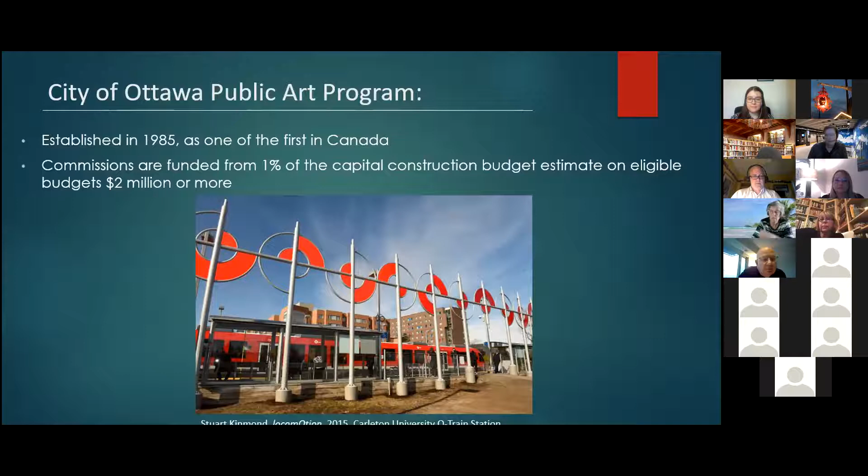So just a little bit about the public art program: we were established in 1985 as one of the first in Canada. It's a city-run program. We obtain 1% funding from all city construction projects that are over $2 million, and we put that funding towards public art projects that you see in and around city facilities and outside. I'm sure you've all experienced at least a few of them.

The O-Train Public Art Program is run out of the Public Art Program. I'm the project manager for the O-Train Public Art Program. We started running the program with the Stage 1 O-Train, initiated in 2012 with 13 stations.

We retained 24 artists for Stage 1 with multiple art projects in each station, with specific focus at Pimisi Station for Algonquin Anishinabe artists. We retained 6 Algonquin Anishinabe artists, along with a mentoring program for Algonquin artisans and heavy community engagement for that station, related to the public art projects there.

All of the stations had a variation of integrated or non-integrated artworks - artworks that were an integral part of the design of the stations, and others that were more standalone. We also program a new gallery space for professional artists in the Rideau station West Concourse, called Corridor 4575. You may have seen that going through downtown.

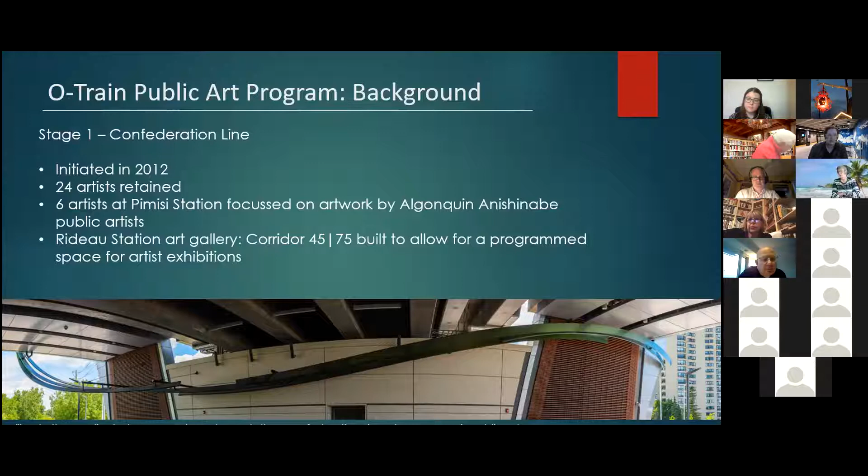Stage 2 is continuing the O-Train Public Art Program with the Confederation Line Extension and Trillium Line extensions. We are including artwork at every single station along the Confederation Line. We have 3 artist teams currently working away, and they've progressed their designs working integral with the station design teams. Each of those teams has about 5 to 6 stations that they're addressing and integrating public artwork into.

For the Trillium Line extension, we have 1 artist team working on a digital public art project within 3 stations: Limebank, Corso Italia (which is Gladstone), and South Keys. They're at the same level of progress. All those teams are at the same level of progress in their designs.

So it's pretty exciting. Specifically though, to this community, to this meeting tonight, I want to talk a little bit more about a really exciting project that we're just initiating in the Byron Linear Park and Richmond Road areas.

Back in 2012, we had identified this area as a really great opportunity for public art because we were aware of all of the construction and work that was going to be taking place in the area. Due to that impact, we thought this would be a really great opportunity to initiate a project that we call civic art, civic practice, or social practice, that heavily focuses on working with and engaging the community.

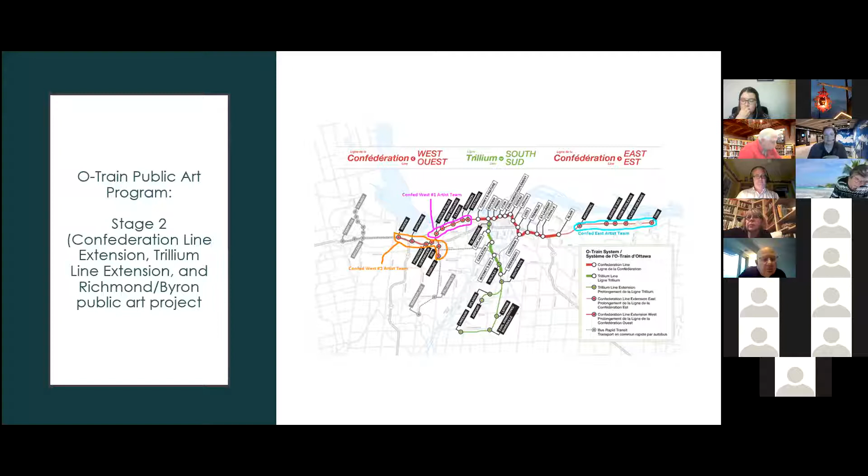Really, the focus of the public art process is the process itself rather than the end result. There will be an end result of some kind, but the process is the thing that's going to really guide us towards what that end result is. And the process is going to heavily involve the community.

Because this was sort of a new type of project for us - we hadn't really done a project to this scale and this heavily involving the community in the past - we thought it might be great for us to strike an advisory group that can basically help guide us and advise us through this process.

So we retained a group of international social practice public art experts who continue to advise us today. There are members of the community on that advisory group, and they'll continue to advise us going forward.

We also engaged a group of grassroots consultants to conduct an initial arts-based community engagement report in the Bay and Kitchissippi wards, and they did that work back in 2019, I want to say. That report was the basis for the call to artists to retain an artist team.

They took a lot of that information - demographics, a snapshot of the cultural community and arts community in the area, including nonprofit and for-profit organizations. It was a really thorough and intense report that really helped lay the groundwork for the artist teams coming in.

So after developing a social practice public art project, the pandemic hit. International politics and mindsets of cultural communities began to shift, which warranted a rethink of our project approach. So we pivoted the project to focus on community recovery and response using an arts-based approach.

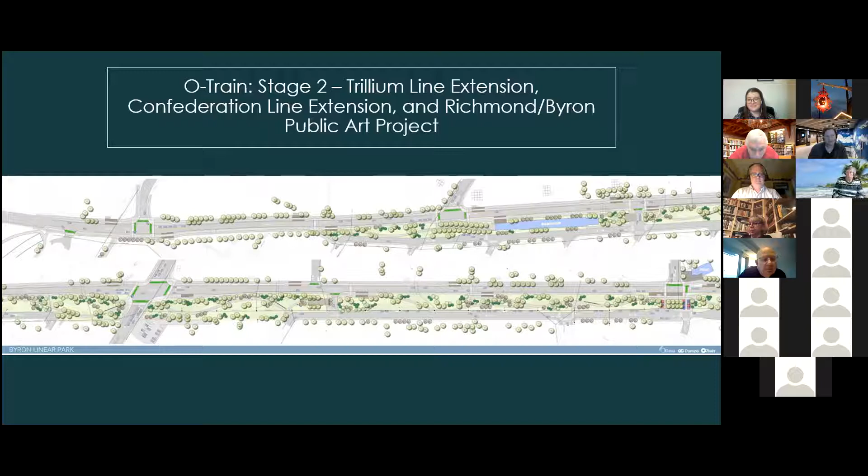Based on that scope, we conducted a 2-stage international competition to find a qualified artist team, and now we have one on board. We have yet to release the public winners announcement or the name of the winning team, so I can't tell you their identity yet, but it's coming very, very soon - in the next couple of weeks, so that is imminent.

The selected artist team, I can tell you, is a group of very enthusiastic and exciting individuals who bring a wealth of knowledge and expertise in their fields, and will be working with the community towards providing the identified project outcomes.

So the outcomes we identified at the beginning of this project were to increase the number of new artists applying to the public art program opportunities, expand the definition of public art, and create a space for new forms of public art. By new forms, I mean not necessarily a tangible asset or a standalone sculpture, but something more ephemeral or involving system changes.

Increase the scale and scope of civic arts practice as a public art form, retain national and international artist teams and agencies for the O-Train Public Art Program to match the level of expertise happening within the Confederation Line and Trillium Line Extension public art projects, and increase awareness and support of public art in the Byron-Richmond community.

So this is a really important and ambitious project for the City of Ottawa. Transit systems are now at the cusp of creating new social space for all people. This project is a continuation of the Stage 1 public art projects, and it's a unique partnership between all 3 levels of government.

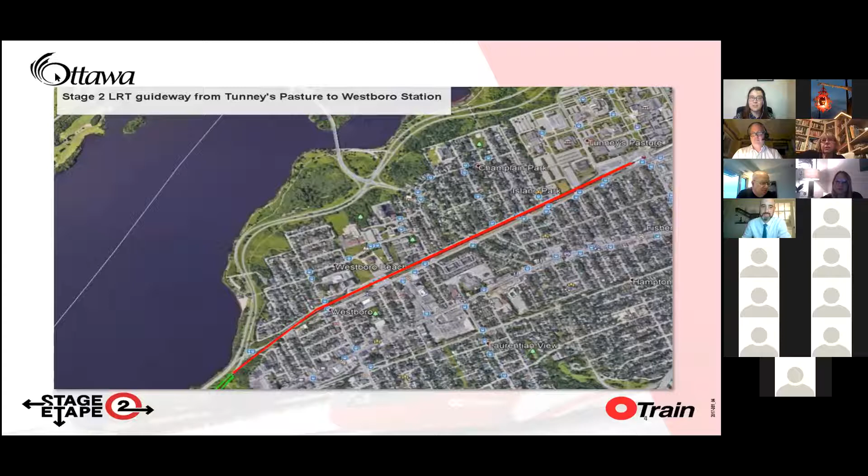So we'll get right into it. Between Tunney's Pasture and Dominion stations, work has begun to prepare for the Transitway detour, which will run along Scott Street and begin in April of next year. The Transitway detour will result in buses operating in general traffic along Scott Street between Tunney's Pasture Station and Churchill Avenue. Scott Street is being widened to accommodate an exclusive eastbound transit lane between Lanark Avenue and Island Park Drive. Additionally, the MUP on the north side of Scott Street will be increased in width to 4 meters. During the Transitway detour, the Westboro station platforms will be relocated to Scott Street.

Detours along Scott Street to facilitate this work in preparation for the Scott Street detour will be in place starting in the fall. West of Churchill Avenue, Scott Street will be extended as a temporary transitway roadway to Dominion Station. This temporary transit-only roadway will be on the south side of the existing transitway until a point just east of Roosevelt Avenue, at which point it will cross to the north side of the existing transitway south of Workman Avenue until it meets the Sir John A. Macdonald Parkway in the vicinity of the existing Dominion Station.

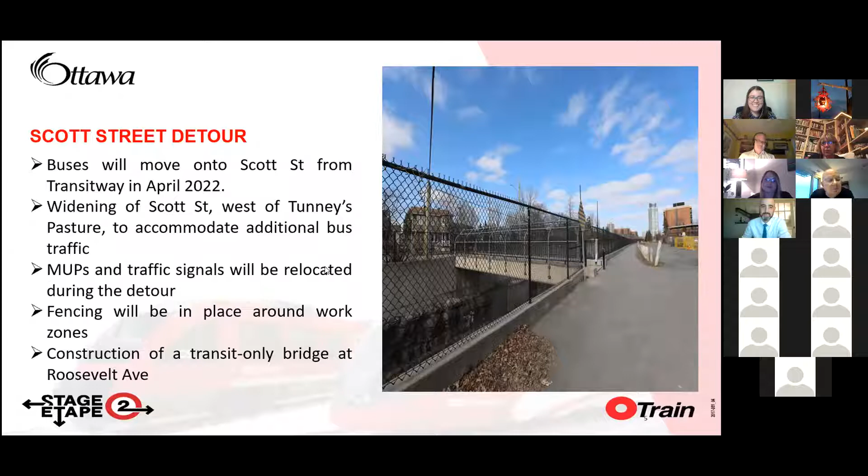During the Scott Street detour that will start next year, the new temporary transit-only roadway will cross the Transitway Trench on a new temporary transit-only bridge, which will be installed this summer. In order to build this bridge, the existing Roosevelt pedestrian bridge must be removed. This removal will occur in May, though the date has yet to be finalized. Utility relocation and other preparatory works for the pedestrian bridge removal and the bus bridge installation are already underway.

Following the removal of the pedestrian bridge, pedestrians will be detoured to the east or to the west to cross the transitway at either Churchill Avenue or at the Parkway intersection. This detour will be in place for the duration of this work and the Scott Street Transitway detour. The pedestrian detour signage will be posted 2 weeks in advance of the detour starting.

Post-construction, following the removal of the Scott Street Transitway detour, the Roosevelt pedestrian bridge will be reinstated in its original alignment.

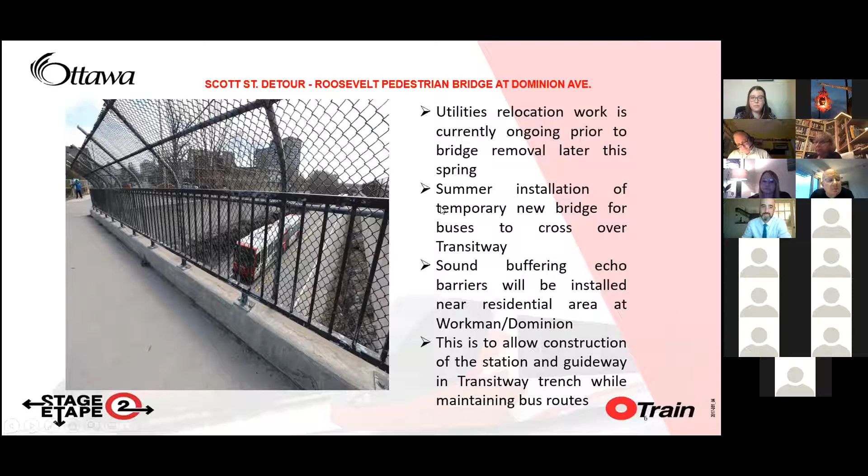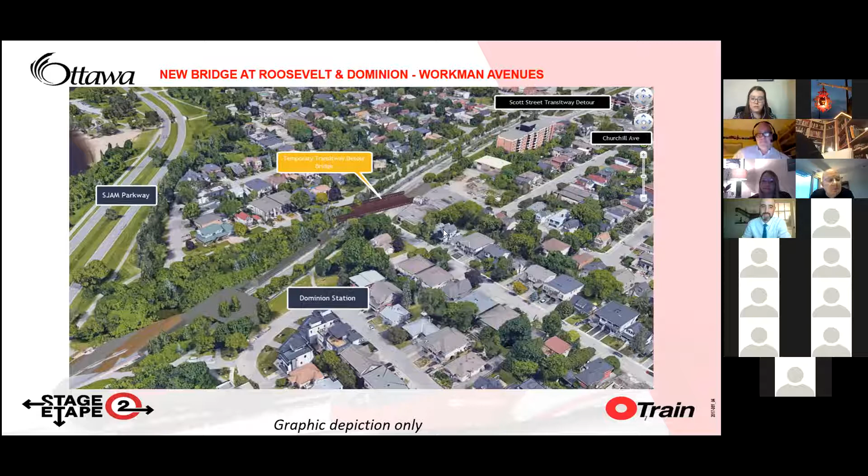Here we have an east-facing aerial image of the currently named Dominion Station area. The station will adopt Kìchì Sìbì as its new station name as part of Stage 2.

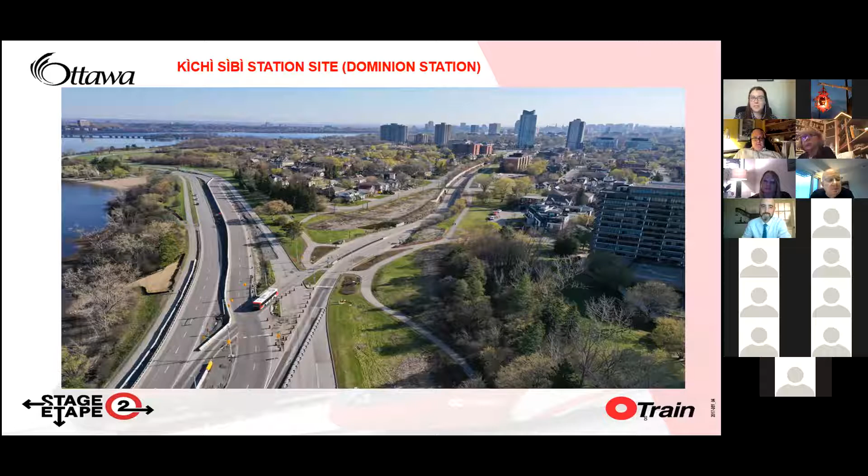North of the Kìchì Sìbì Station area, utilities relocation work between Atlantis Avenue, the Parkway, and Kitchissippi Lookout is advancing. This work will require closure of Atlantis Avenue between Lanark and Selby. Local access for residents will be maintained, and a notice of road closure will be delivered to affected residents ahead of the closure starting, which is currently anticipated for mid-May.

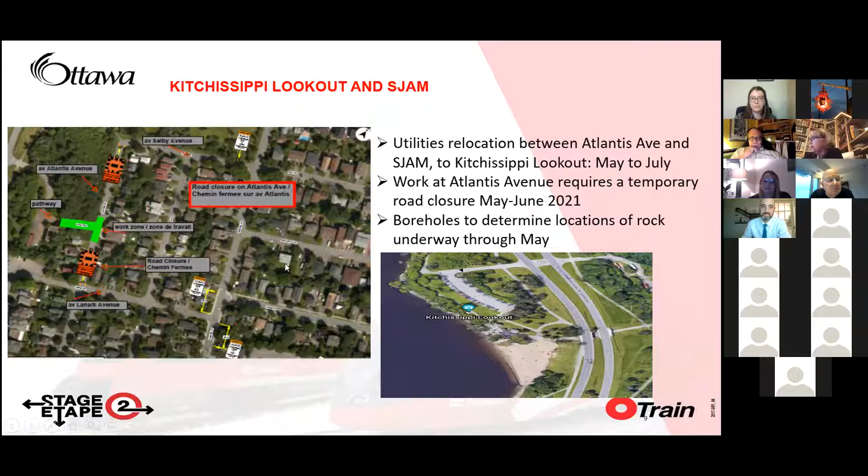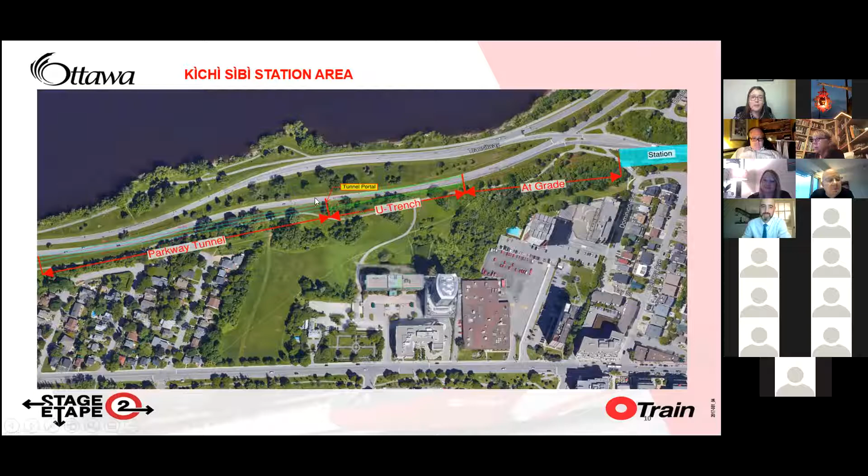I believe there was a question about how this transition was happening, so I hope this illustration provides an answer to that question.

Installation of the slurry walls to support the eventual tunnel excavation along the area behind 655 Richmond between Rochester Field and Cleary Avenue is progressing.

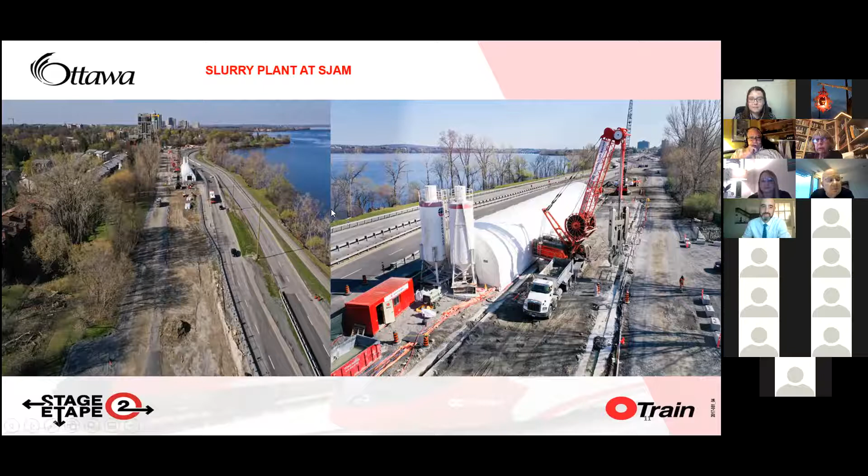Over the next two slides, so this one and the next one, we have some images depicting the operations at this site. We'll give everyone a few moments to look at those.

I have corresponded with a few residents regarding issues about loud music, profanity, and dust here at the slurry plant location. The team endeavors to be a good neighbor and responsive to complaints when they are received, especially where it concerns loud noises. Corrective messaging is always issued to the on-site crews.

To control dust, the access road within this site is currently sprayed and swept at least twice a day. A dust suppressant will be laid down on the road within the next 2 weeks. This will reduce the need for the daily spraying and sweeping, but spraying and sweeping will continue on an as-needed basis after the dust suppressant is laid down. These mitigation efforts help to reduce dust, but cannot completely eliminate it.

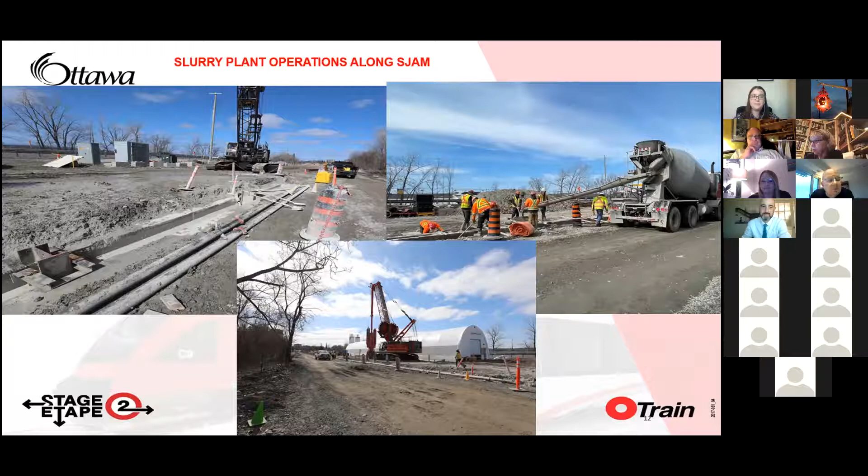In the Cleary Avenue and Richmond Road area, excavation related to utility relocation work in order to make room for the construction of the tunnel is continuing. Installation of a new 13-meter deep sanitary manhole for the West Nepean collector sewer is ongoing. Installation of a new water main will occur this summer with completion expected in August. During that work, road detours will have to be implemented. Utility relocation work in this area is expected to be completed by the end of the year.

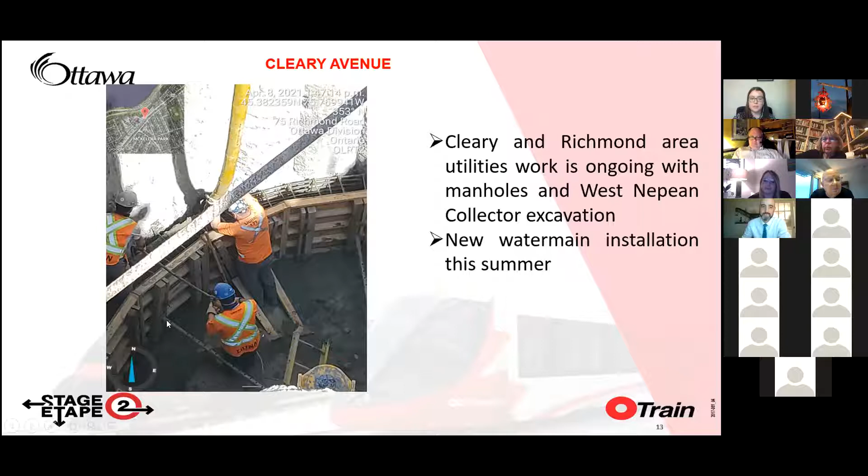Excavation work for the portion of the tunnel where it will cross Cleary Avenue, connecting the Byron Linear Park segment of the tunnel to the SJAM Parkway segment of the tunnel, will start once the utility relocation work is complete. Here on this slide, the red shading represents where the alignment and excavation does cross Cleary Avenue. This work will start next year once all the utility relocations in the area are complete. Detours will be required to complete this work as well.

This is a very rough sketch, but the pink line, which I hope is visible to everyone, does represent where sidewalks will be maintained to preserve pedestrian access while that work is going on.

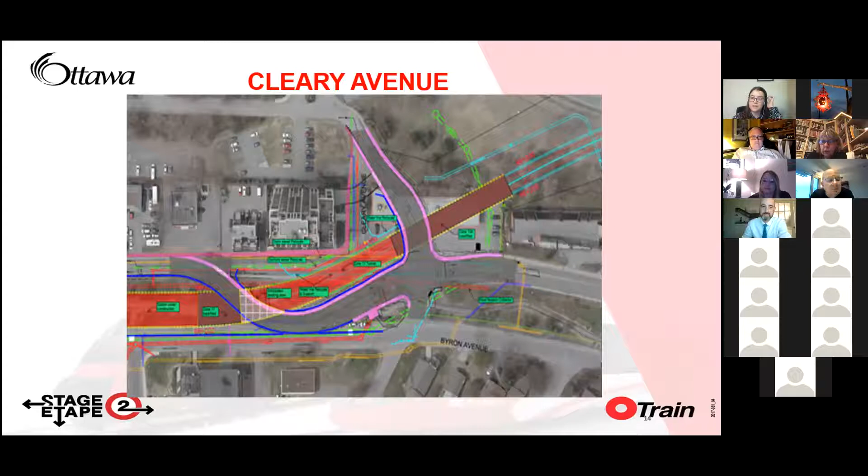Excavation work within the Byron Linear Park at the Sherbourne Station area is expected to begin in late June, once the retaining walls or secant piles have been built.

And here's where I'm going to turn things over to Damon, who will go over the work occurring within Byron Linear Park all the way to Woodroffe. If you attended Tuesday's information session with Councillor Kavanagh, a lot of this will sound familiar. So Damon, I'll turn it over to you with the next slide.

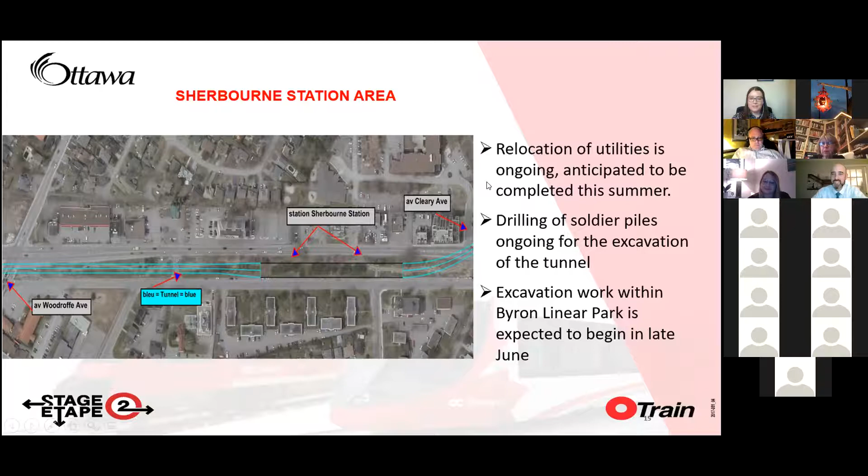As Jessica just noted, work is occurring, work is progressing. The theme of 2020 was utility relocation, creation, renewal, and that is still ongoing but closing to finish. It's so important because it makes way for all of these other important aspects.

Paving began west of Woodroffe, is progressing east of Woodroffe, and will progress into May. That's a really nice thing. For those of you who live on Byron, I know that the work there has created an additional level of dust, and I do appreciate that that's challenging at the best of times.

So with luck, once that gets paved, the temporary concrete barriers will get reinstalled, with echo barriers installed atop that. That will further mitigate the dust. The streets will get swept, and dust suppressant will be put on over the weekends when work isn't occurring.

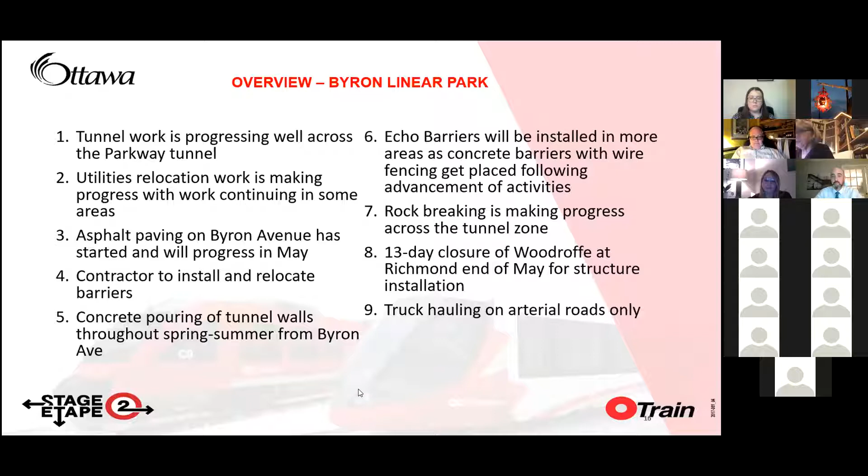The cut and cover tunnel, as Jessica mentioned, will be to an average approximate depth of 10.5 meters. I mentioned there's been a few weeks of weekend work at New Orchard Station. New Orchard Station reached its maximum depth of 10.5 meters last week, which is huge. What's also pretty amazing is the only remaining elements of excavation in that area are the elevator pits and the sump pump pits, at which point that work is going to shift.

The entirety of the cut and cover tunnel from the Byron section and the Parkway tunnel - the rough estimation is that that work will continue until 2023. I can just imagine eyes rolling and voices sighing, though because this is virtual, I can only imagine it.

But note, the impactful work is not always going to be the work, right? Sure, rock breaking, that's not an easy pill to swallow. But when we start talking about concrete pours - well, a concrete truck is noisy in itself, but the concrete pouring, that's not so bad. Installation of formwork - there are activities that will occur that will be construction and in your face, but won't be the level of 'oh my gosh, I need to move' kind of impact. I'm quoting emails I get.

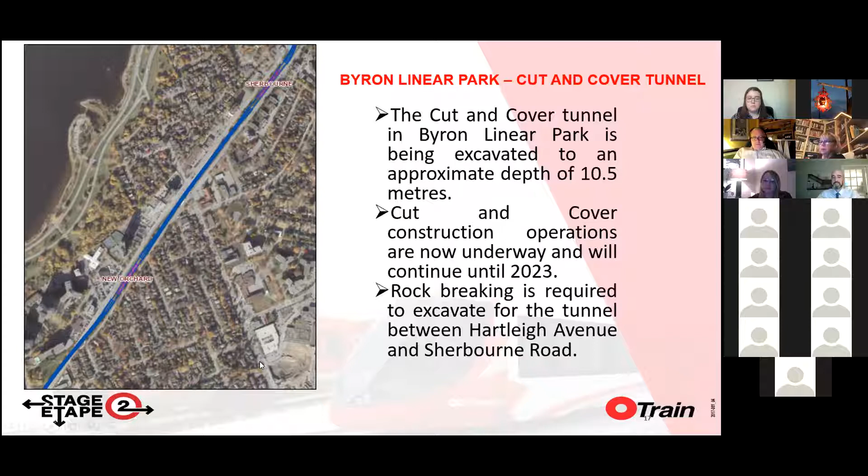What I have here are a few photos that represent the work achieved west of Woodroffe. I think you'll be quite impressed, as I am, at the level of progress being made. While I can attest to the frustrations one feels, especially with young kids during COVID, it all seems like the perfect storm. But the perfect storm leads to great results, sunny skies at the end of the day.

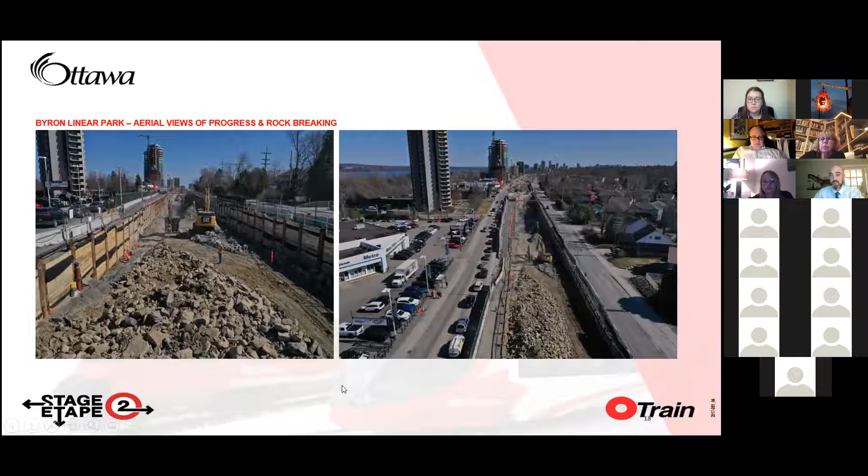Next slide. Now, I did tell you about a 13-day closure of Woodroffe.

Ultimately, what we are aware of is that the train will be progressing east and west underneath the Byron Linear Park. In order to achieve a cut and cover tunnel underneath Woodroffe Avenue, we are required to close Woodroffe Avenue for 13 days, beginning on May 28th. That will allow the crew to excavate, break rock, and get to a depth where they can put in a metal decking—similar to driving through a construction zone and going over a metal plate on the road. That's effectively what we're going to have here, allowing traffic to resume on Woodroffe, north and south, once the closure is over.

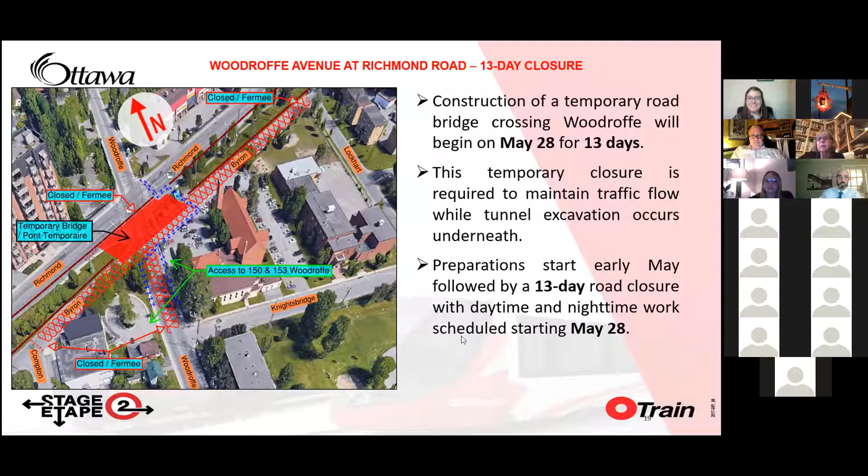And here we are. Next slide, please. I believe that might be the end of me. Excellent—it's been an absolute pleasure, and I'll be around for questions at the end. Thanks a lot, Jessica, you're doing a great job. Thanks, Damon, you did a great job as well.

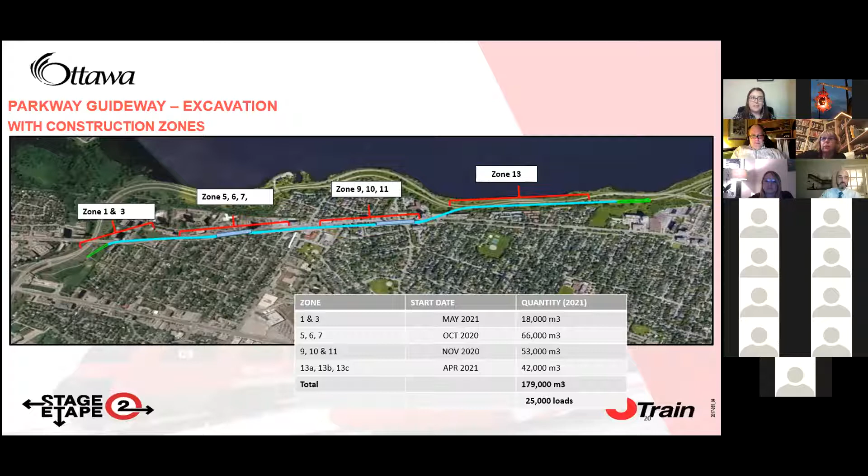Moving to the next slide, here we have some figures quantifying the amount of work completed this year. For the Parkway Tunnel between Rochester Field and Cleary Avenue, 42,000 cubic meters of material will be excavated. For the Byron Linear Park tunnel portion between Cleary Avenue and Woodroffe Avenue, 53,000 cubic meters will be excavated. In total, along this Parkway tunnel alignment shown here, 179,000 cubic meters of material will be excavated in 2021.

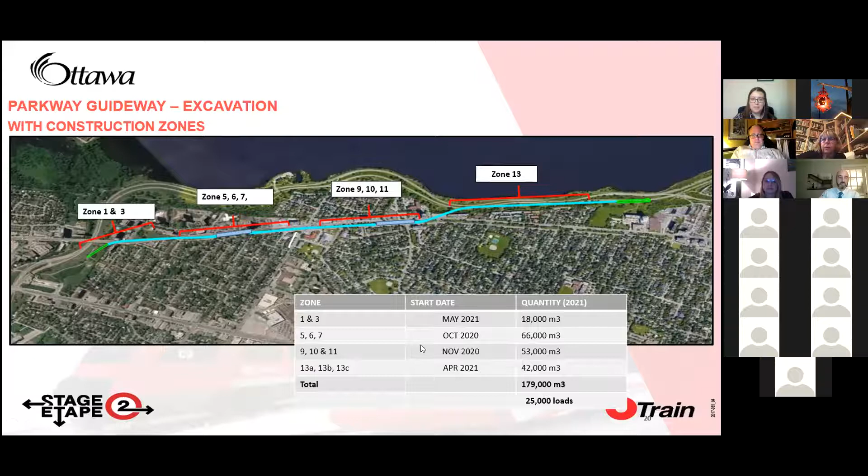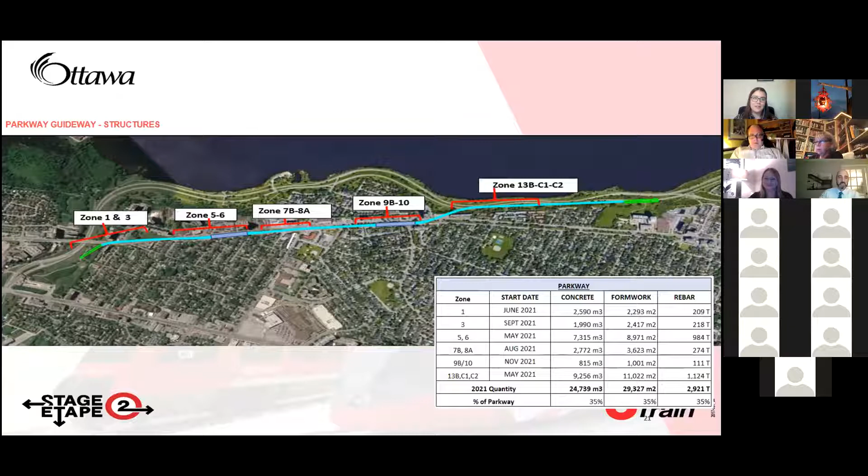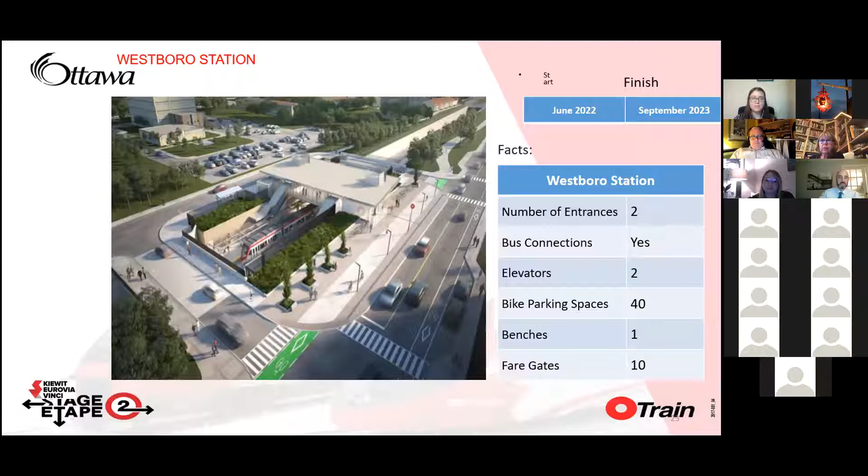Kitchissippi Station will be located within the Transitway Trench with a public entrance plaza at grade. This plaza will provide a pedestrian connection from Dominion Avenue to Berkeley Avenue. 60 bike parking spaces will be provided within this plaza, and passenger pickup and drop-off spaces will be provided along Dominion Avenue. Construction of Kitchissippi Station is expected to start in July 2022 and be completed in March 2023.

Some concerns have been expressed regarding the traffic related to the passenger pickup and drop-off area along Dominion. The LRT station will serve the same function as the current bus station, and the level of drop-off or pickup traffic is not expected to increase dramatically as a result. While today vehicles might simply pull over along the side of Dominion to pick up or drop off a passenger, the addition of these time-restricted, designated drop-off and pickup spaces simply dedicates an official space to fulfill that function, keeping them off the general traffic lanes.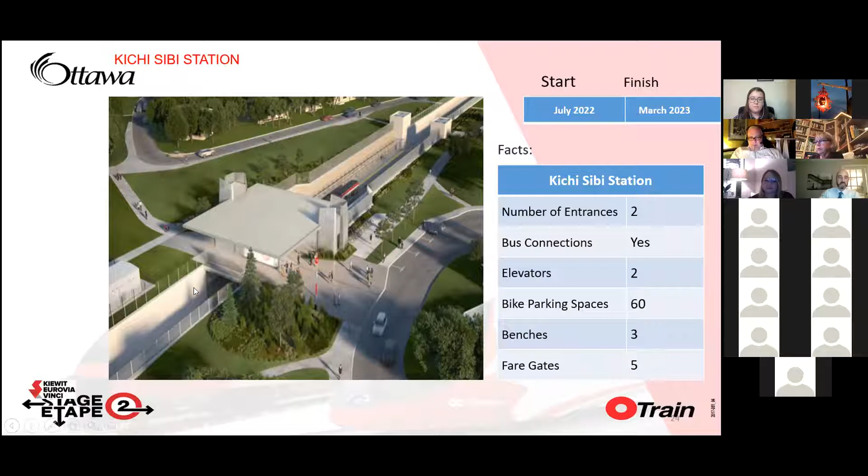Sherbourne Station will be a new station located within Byron Linear Park, west of Cleary Avenue. 20 bike parking spaces will be provided in the entrance plaza, and passenger pickup and drop-off spaces along Byron Avenue. Station construction is expected to start in June 2022 and be completed in November 2023.

Just like this evening, we're focusing on the work being completed in 2021 - a lot of preparatory works, utilities relocation, and excavation work. We'll host another one of these information sessions going over the work in 2022 and 2023, and that's where we'll start to have more information about what station construction will entail.

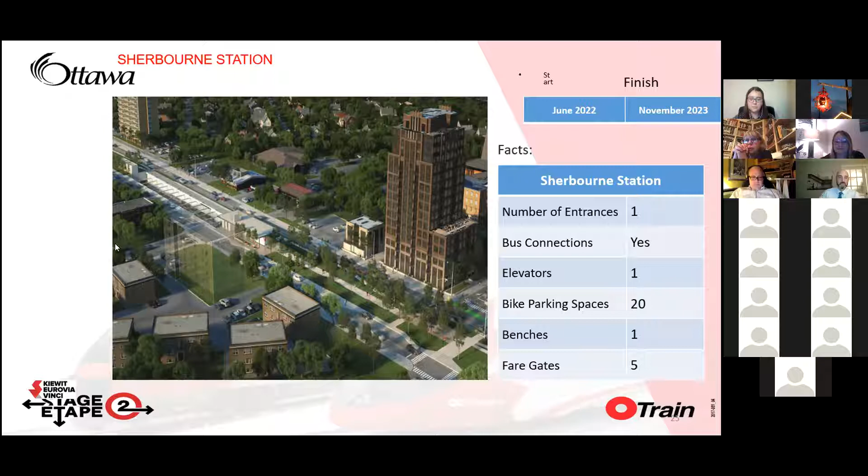So we'll move on now to some of the anticipated impacts of construction. One of those of interest is always the hours of work. The majority of work will occur from 7 a.m. to 6 p.m. on weekdays.

Intermittent weekend and night work will occur in some areas. Weekend daytime work will generally begin at 8 a.m. on Saturdays and at 9 a.m. on Sundays. Some important things to be aware of are that construction is permitted to occur between 6 a.m. and 10 p.m., 7 days a week.

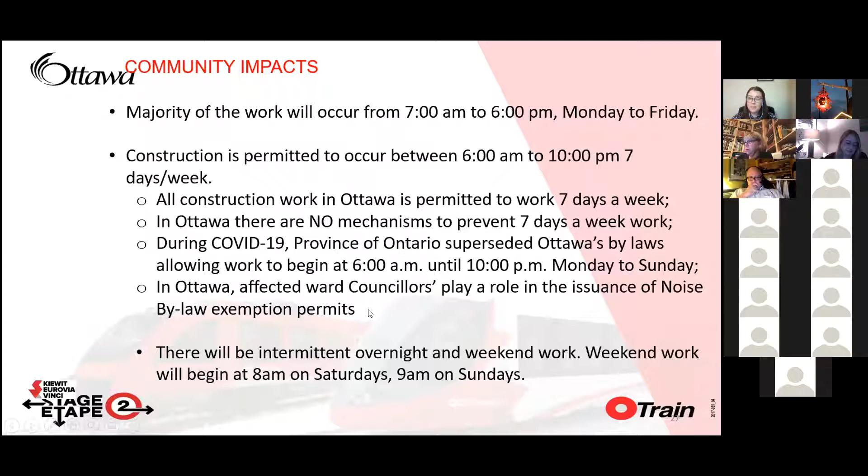This goes for all construction work in Ottawa - it is permitted to work 7 days a week, and there is no mechanism which exists to prevent work taking place 7 days a week. As part of their COVID-19 pandemic response, the provincial government has superseded the City of Ottawa noise bylaws, allowing daytime work to begin at 6 a.m. rather than 7 a.m. and continue to 10 p.m., Monday to Sunday. Affected ward councillors have the ability to play a role in the issuance of noise bylaw exemption permits as they relate to night work.

Continuing with the impacts, noise and vibration from trucks circulating throughout the construction corridor, as well as the equipment used to complete excavation work, can continue to be expected. Noise and vibration levels are continuously monitored and reported to the city to ensure they remain within the limits established for the project. We did talk about dust suppression and street sweeping - that will be ongoing throughout the corridor. Site lighting for overnight work can be required, and where it is, an effort is made to ensure it's pointed away from residences so it doesn't stream into sleeping areas.

All pedestrian, cycling, bus, and vehicular movements will generally be maintained during construction, apart from road closures, such as the 13-day closure at Woodruff and Richmond. When vehicular movements are maintained, this can sometimes be through detours, so it might be a little bit different from the paths you may be used to.

All pedestrian and cycling movements are, of course, maintained even when there is a closure, as pointed out, for Woodruff and Richmond. No matter what method you use to get around - car, public transportation, walking, cycling - it's important for everybody to use extra caution when moving through construction zones and really pay attention to detour signage, which can change.

Thanks, Jessica. I'll just upload this, see if that works, and now go to slideshow. Try again. Do you see it in a slideshow format? You're showing your notes. Oh no, sorry, you're showing a preview version. Oh, so main slide and next slide. Leonor, if you go to display settings at the top. That's right, then click on the little triangle. Where's display settings? Your Zoom menu bar might be covering it, might just be very slightly exposed. If you go back to your slideshow icon that you were in, okay yeah, click on that, and then at the top where it says show taskbar, just to the right of that, see that little icon with the screen? Go over a little bit to the right, yeah one more, display settings, the next one over is mute. Yeah I know, it's hiding under your Zoom menu. Oh that's funny, Leonor, the Zoom menu, you can actually move it out of the way. Ah, that worked, if you go back to the slideshow. I'm sorry everyone. It's okay, I had the same issue earlier, we all had to figure it out too, don't worry about it. Trying again, yeah I'm not sure why it's not resuming. Can I just do this? Can you see this now? Does that work? I can see that all right, yeah. Is that okay? Yeah, because it's not going to slides now for some reason. And you can also, Leonor, shrink your top toolbar at the far right with the little pin, it'll disappear. This one. Oh, technology is not my friend this evening.

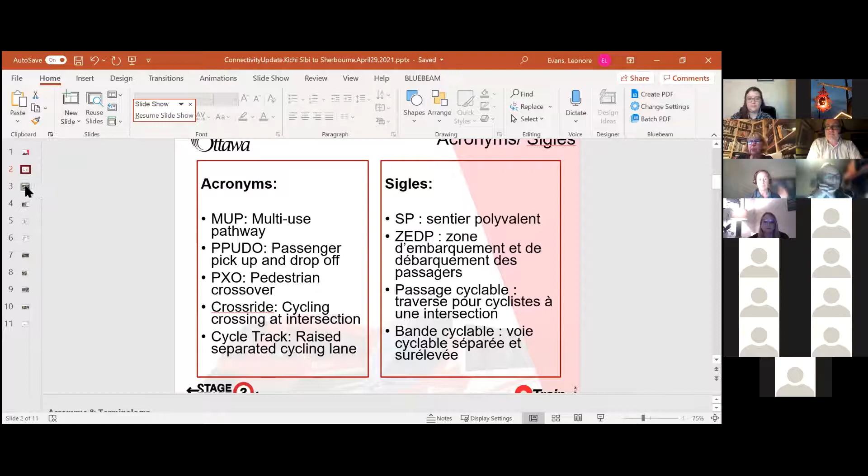The purpose of the connectivity review was to look at how pedestrians and cyclists get to and through the stations. As Jess has already shared, Kichi Sibi Station, formerly known as Dominion, well, we do have that final location. I know there was a question posed earlier about where that station will be located. So there is a final location, and you can see here the pathways as they'll run west towards Churchill and north towards Workman, as well as over to the Sir John A. Macdonald there, and then south or east towards and along the Sir John A. Macdonald.

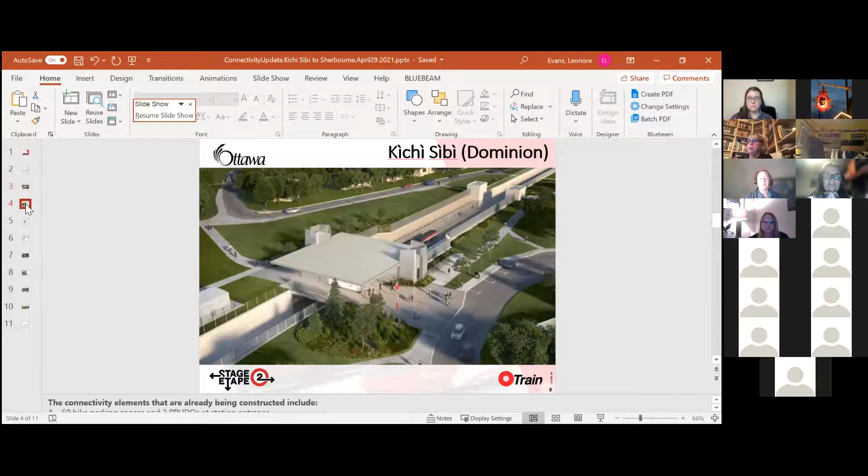A lot of this has already been covered. The main item I really wanted to bring to the group today is that we are adding lighting along the pathway between the station and Churchill. That was not originally included in the project agreement. However, we've reviewed all of the recommendations brought to us by Plan Design, who led the 2020 connectivity review, and that was one that we're going to go forward with.

Some of the other items we maybe didn't touch on: the Roosevelt pedestrian bridge that was mentioned already. There will also be a sidewalk along the east side of Berkeley, that's another item in the project agreement. And then there are the pedestrian crossings of the Sir John A. Macdonald.

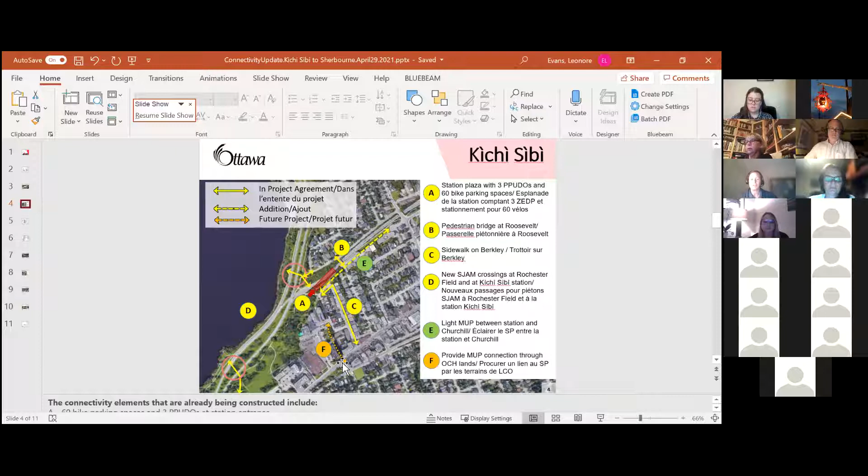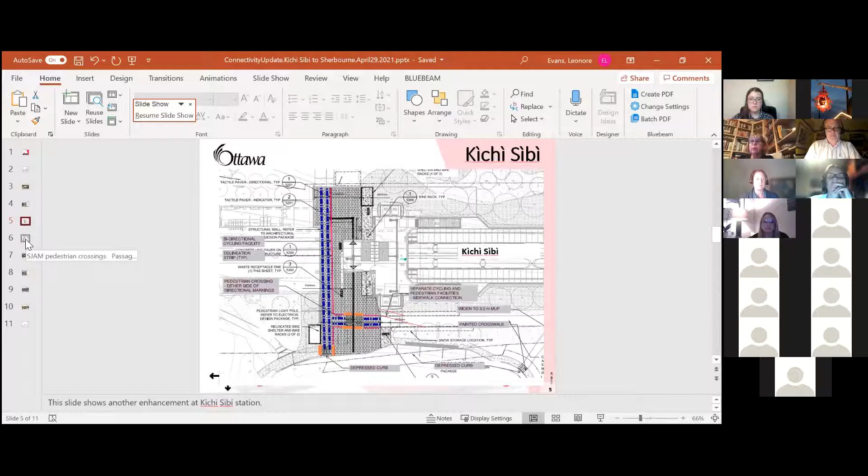The other big change we're doing at Kìchì Sìbì Station, as you heard from Jess, is putting in 60 bike parking spaces there. We're really expecting it to be like the bike shed, with all the residents from the north and south - it'll be a great station to bike to as well as bike through. So we determined it would be important to separate the users at this station: cyclists will be on asphalt, and pedestrians will be on the plaza, or the pavers of the plaza. So that's really Kìchì Sìbì.

Here is a high-level overview of the pedestrian crossings along the Sir John A. Macdonald. There's 4 of them between Cleary and Churchill. Churchill will be an underpass, so completely grade separated. Kìchì Sìbì and at Rochester Field, those will be pedestrian signals. And down at Cleary, which connects into Sherbourne Station, that will be another underpass there. So those are 4 really important improvements for the neighborhood.

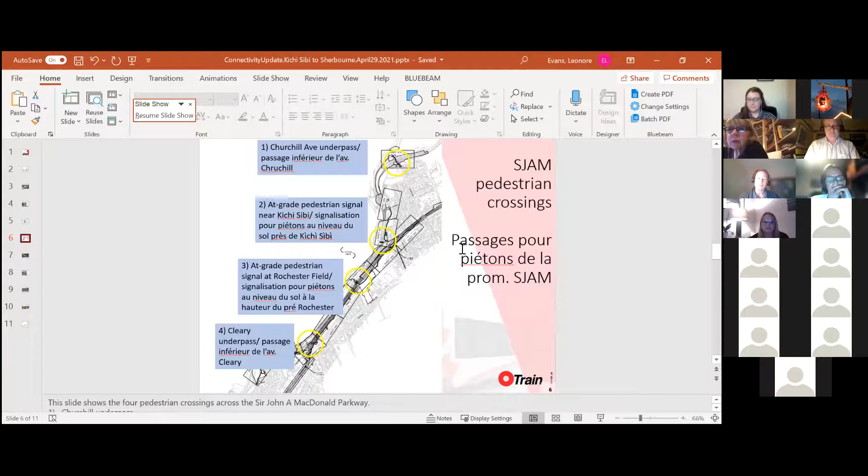So for Sherbourne, Jess has already touched on it, and to be honest there weren't really any connectivity enhancements recommended for Sherbourne. Maybe the one item I didn't touch on is that we will close Redwood at Byron, so that's a big change. Again, it's really about trying to increase pedestrian and cyclist safety as people get to and travel through the stations.

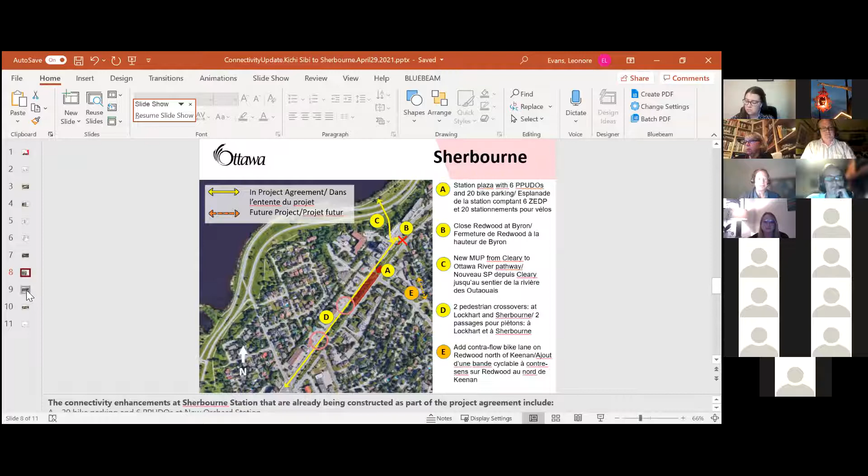So the last 2 slides I'm going to pass over to Martha, and she's going to talk about Richmond Complete Street and the Byron Linear Park, and then we'll get to questions.

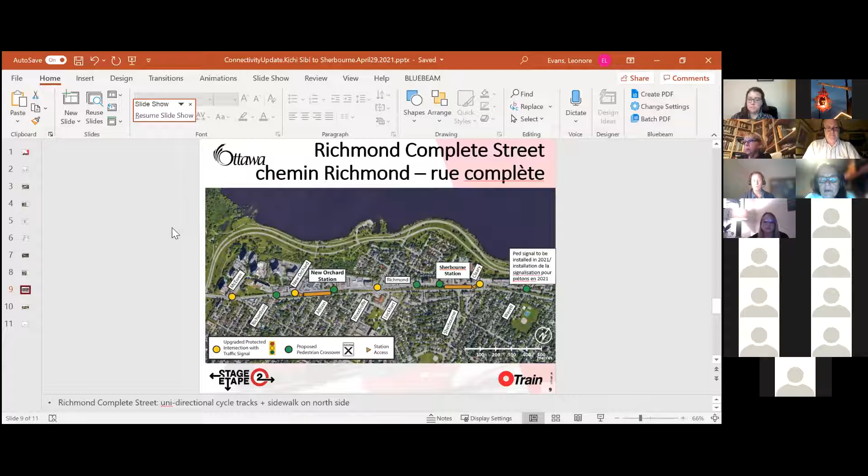I don't know if some of you remembered, I was involved with the preliminary design back in 2016, 2017 for Richmond Road Complete Street, Byron Linear Park, and all the great discussions we had over the ultimate location of the alignment. So basically what we're here to say this evening is what we committed to back in 2016 is what we are still committed to, what the city is still committed to completing in 2020 and moving forward into the final agreement and the final construction of Byron Linear Park, Byron Avenue, and Richmond Road.

Leonore's talked about the highlighted sections on here, which are the pedestrian crossings of Richmond Road that have been integrated into the contract. What we had talked about earlier was the decision that the pedestrian crosswalks, to the most part, align with the proposed bus stops along Richmond Road. So if you lived on either the north or south side of Richmond, or the south side of Byron, and you were going to or from the bus stop, you would have a clear line of approach. We wanted to strengthen that connectivity between the two sides of the Richmond-Byron corridor. You can see New Orchard Station and Sherbourne are clearly indicated there. So we're just maintaining what we said we were going to do, and the good news is that there's no change - the status quo is moving forward.

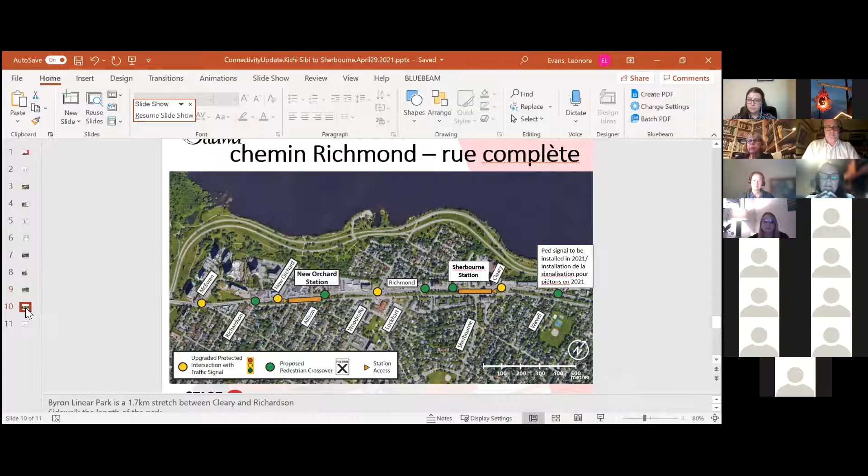This is again what we're proposing to do for Byron Linear Park - very much a space where there's lots of recreational opportunities. Public art could happen in some of the nodes developed along the corridor, and really seeing this as an environmental passageway that has rain gardens, lots of plant material and shrubs, great walking. It will be lit - right now Byron is not lit, but we committed to and are maintaining the commitment to lighting the pathway along the corridor. So if you're on the south side of Richmond or the north side of Byron, you've got a well-articulated lit pathway that will provide connectivity to both stations as well as to the community.

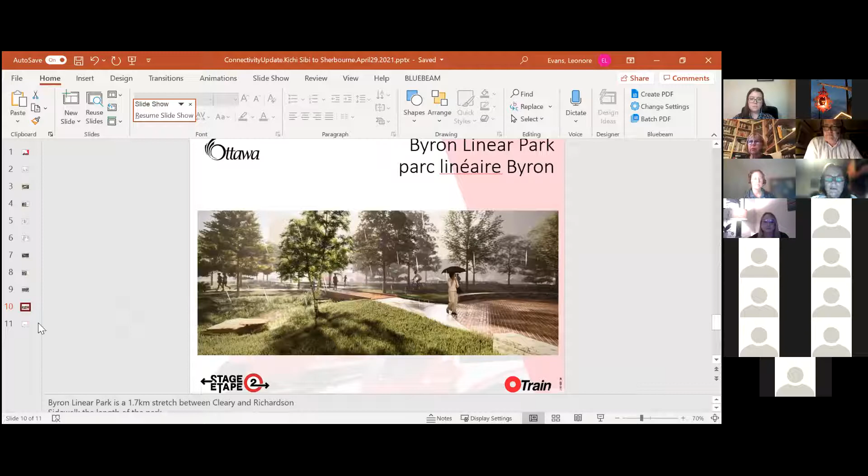Is there one last one, Leonore, for the station? Nope, that's it. Perfect. So thanks, Martha. No worries. I'm going to stop sharing now and pass it back to Tom or Jessica. Okay, thank you, Leonore.